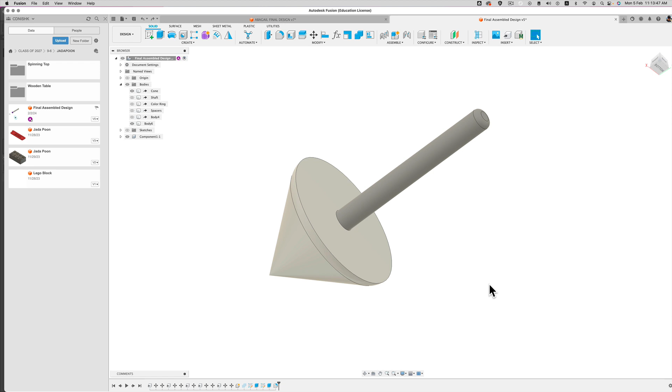Hey Jada, in this recording we're just going to look at how to solve a problem that's been discovered after printing out the first version of this spinning top. And the problem is that when it is spun, it doesn't stay upright, it falls straight over. And so what we want to figure out is how to solve that problem.

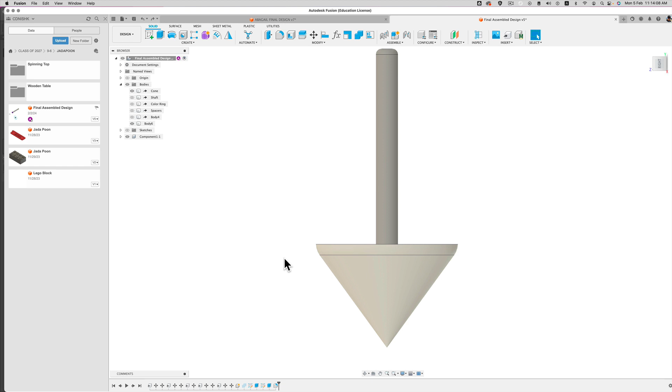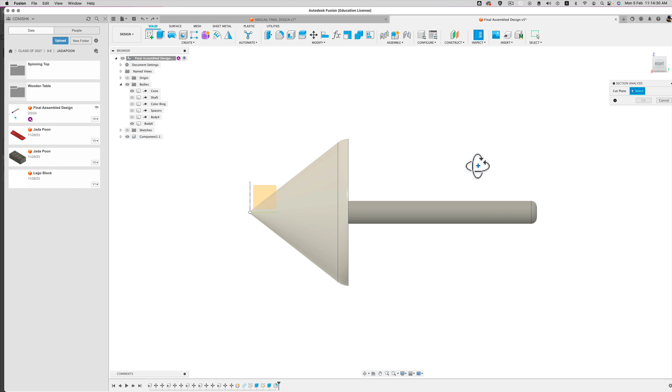And from a little bit of research, I determined that if we concentrate the density of the printing lower down onto the spinning top here. At the moment when it's printed all the way through, all the material comes through. We can get a look at that by using a section analysis. With the section analysis tool, you can basically take a look inside your models.

I've already modified this spinning top so that the shaft is printed separately from the cone, just to make it easier to print it. And now we're just taking a look at the cone itself, and you can see the pink area represents the density. So it has material being printed in it all the way through, from the very top of this surface right down to the point there.

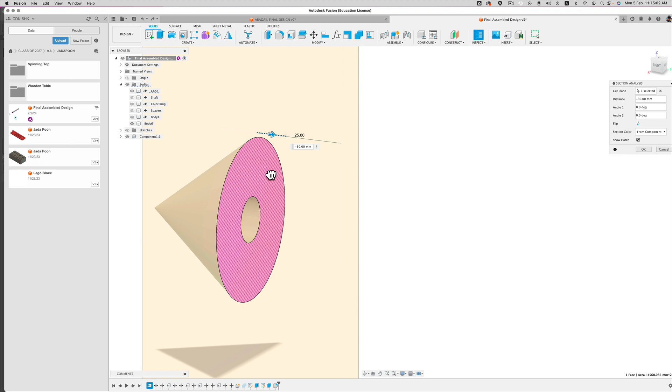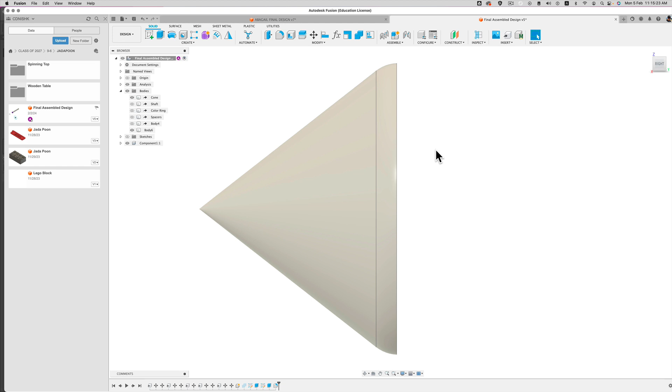And so what we want to do in order to promote spinning and have this stay upright when it spins is lower all the mass down. So basically lower the center of gravity. At the moment all the mass is concentrated in the entire part of this cone, and so my idea is simply to use an offset plane to split this body.

So I'm going to just create my plane from this surface and move down, say like 30 millimeters, and take a look from the right here and click OK. And I'm just basically going to use this plane to split the cone and shell out the top part above the split, and then keep the bottom part filled in with a high infill percentage when we print it.

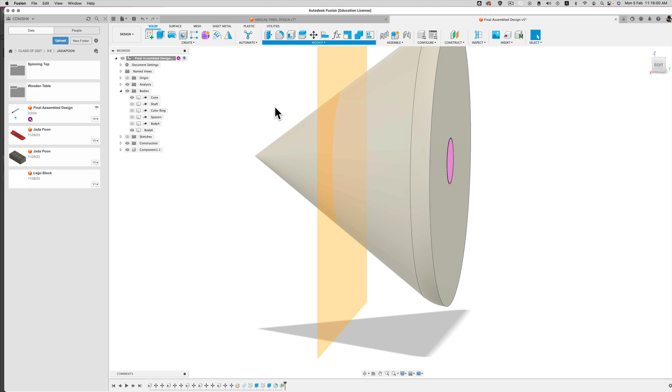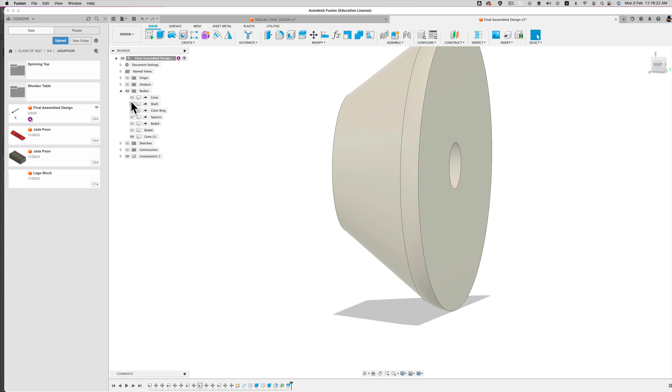And so I'll go up here now to the modify menu and choose split body, and choose the cone. The splitting tool will be the construction offset plane, and now we have the body split. I'll turn off this construction plane to make it a bit easier to see, and I'll turn the analysis off as well. So we have now a cone that is two parts. That's one part, and this is the top part. Okay, and the bottom part we want to keep.

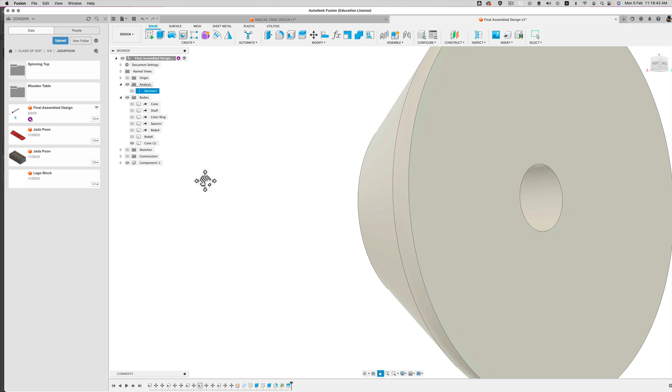If I turn the analysis back on, we want that bottom part of the cone. Where's the analysis? Yeah, here it is. Basically we want to keep it solid, so we're going to leave it as is. I'll turn it off now. Turn on the top part. This part though, we're going to hollow it out to lower the center of gravity.

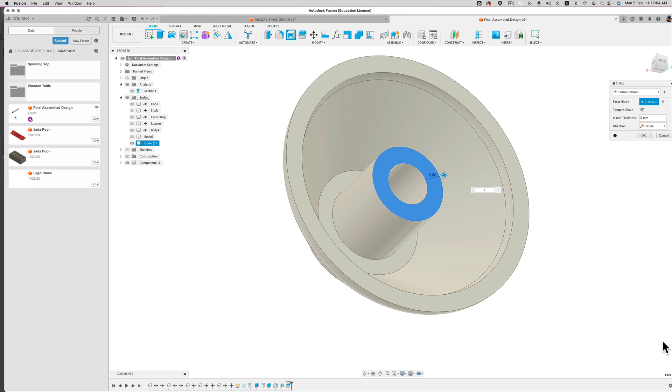So I'm going to use the shell command for this, and then touch the top surface, and I'm going to use a 5mm wall. So you see that's 5 millimeters going around, shelled out, and it's hollowed out the spinning top. And I'll click OK.

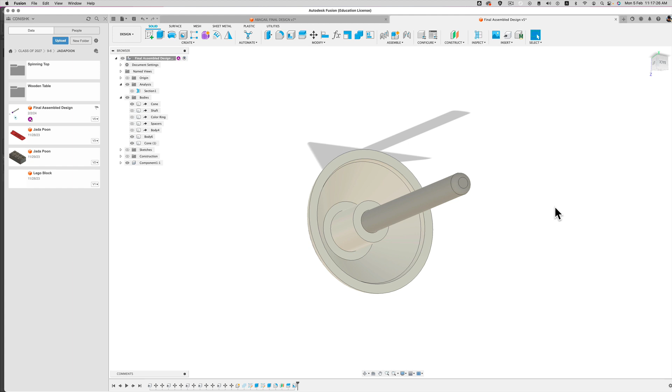Now of course you can see that when this is assembled, we'll put the bottom back on and the shaft, that we have kind of an undesirable part here. We have a hollow, but I think for the test this is okay. If we decide to cover it up, well, that can be done as well. So for this part of the problem solving process, I'm just going to send to the printer these two separate parts, and then we'll see what happens.